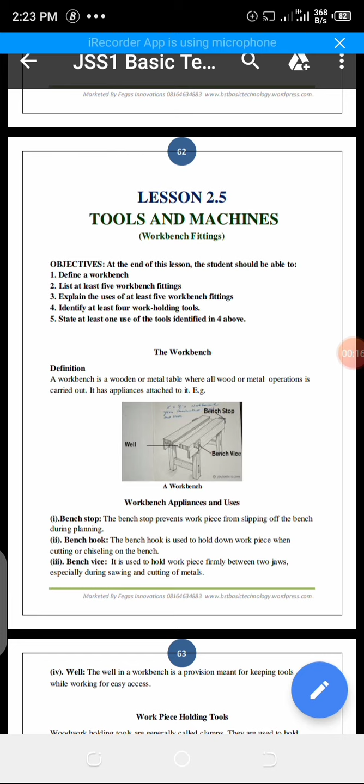So, what is a workbench? A workbench is a wooden or metal table where all wood or metal operation is carried out. It has appliances attached to it.

What is this definition saying? It's just like a table. If you go to a tailor shop now, you see a very big table, that's where the tailor will do the cutting and everything - it can be called a workbench. If you go to a carpenter shop now, you see a very wide table too. You see chisel on it, wood grains on it, a planer on it - planer is used for smoothing. You see so many things on it. All these tables are all called workbenches.

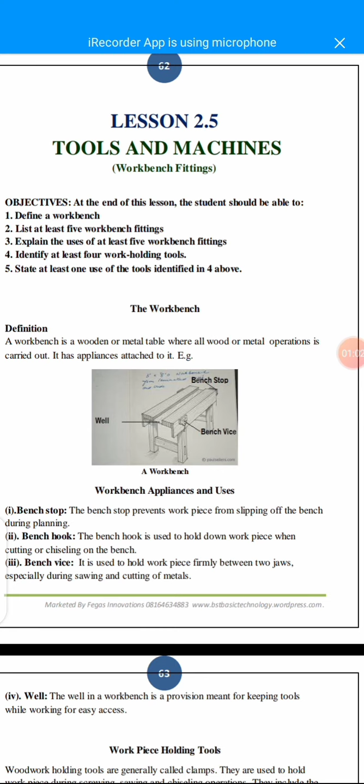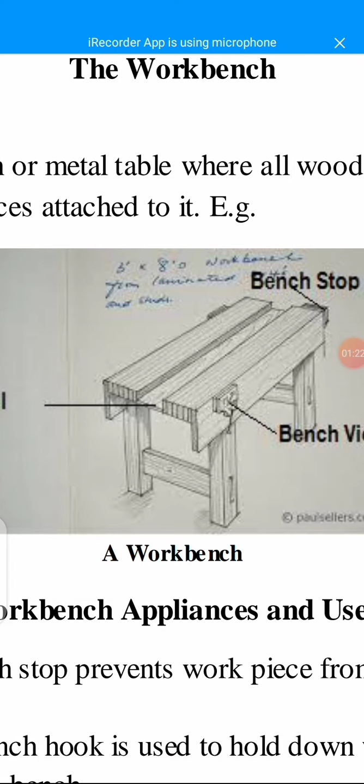Also, if you go to a welder's shop too, you see something like that. This is like the picture of a workbench, and it has different appliances on it. It's just like a table - it can be metal or wooden, based on the purpose. For a welder now, a welder cannot use a wooden workbench.

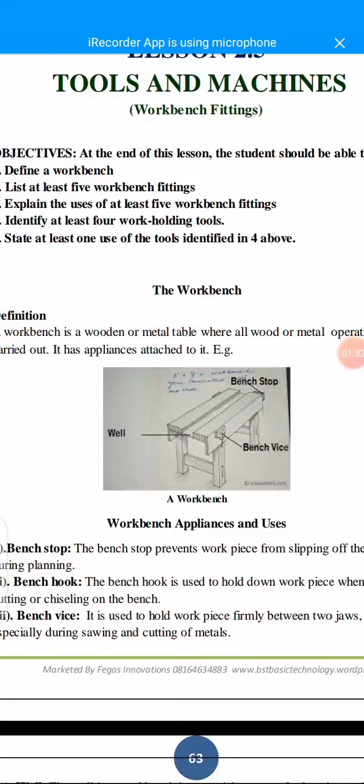It won't work because they work with electrical welding arc and electric stuff. So now we have some appliances, and these appliances have uses. When we talk about workbench appliances, we're talking about appliances attached to a workbench - just like electrical appliances, when you see electrical stuff like a radio, they are all electronic appliances. So these are workbench appliances.

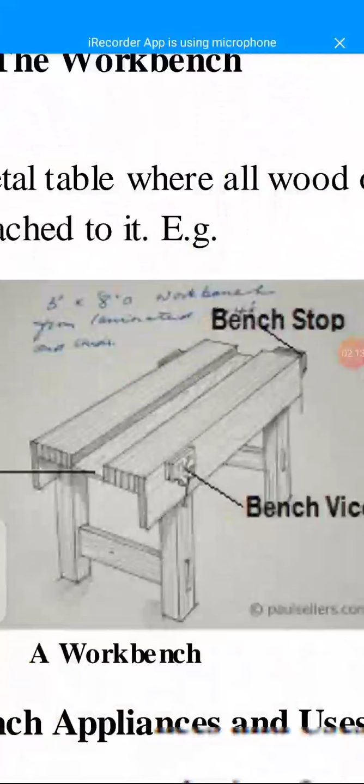The first one is called the bench stop. What's the function of the bench stop? If you look at it, the bench stop is towards this corner. The function of the bench stop is used to prevent workpiece from slipping off the bench during planing.

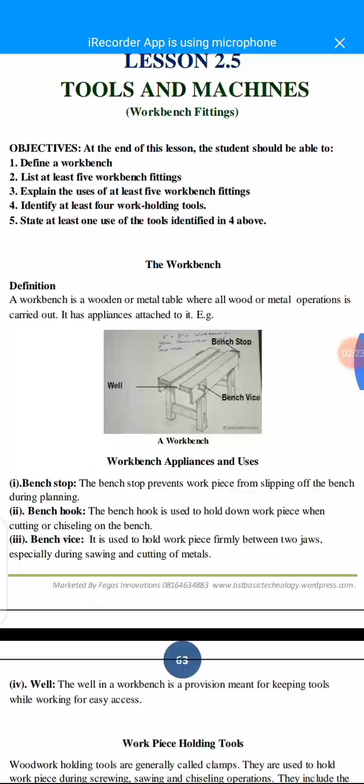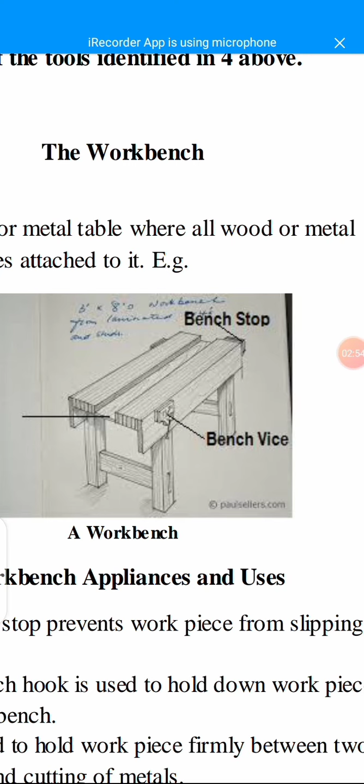Planing means smoothing of something. So when you are smoothing your wood, trying to use a planer, there's something called a bench stop that will not allow the wood to move. The wood is an example of a workpiece. Don't let the word workpiece confuse you - it just means the thing you are working with. If you are a plumber, your workpiece will be a pipe. If you are a welder, your workpiece will be a metal. If you are a carpenter, your workpiece will be a wood.

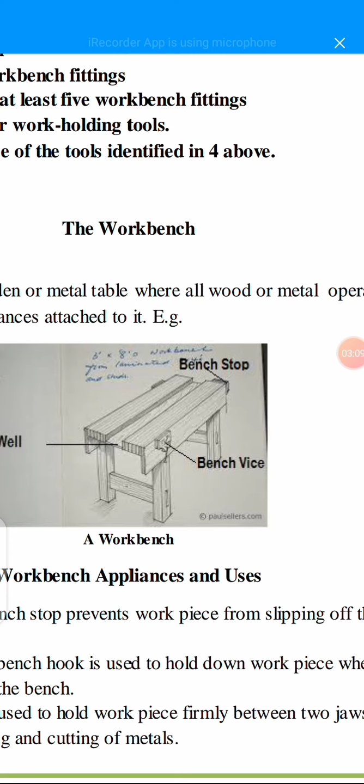So the bench stop allows it not to slip. When they are working, instead of the apprentice having to hold the thing for them, they don't need that. They just put it on the workbench, and the bench stop will help them hold or prevent the workpiece from slipping.

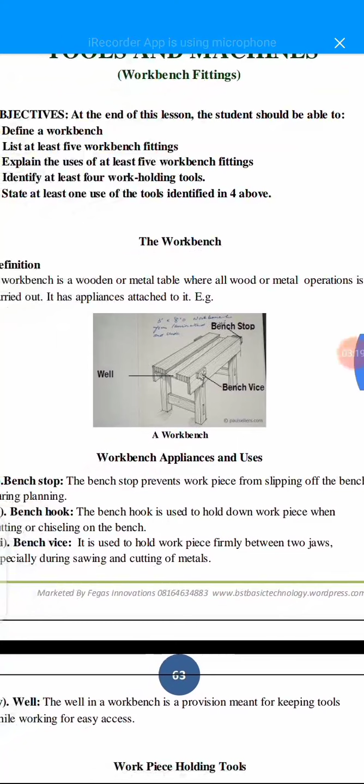Another one now is the bench hook. The bench hook is used to hook or hold down workpiece when cutting. So when you want to cut something, you don't have to tell the person working with you to hold this thing for you to cut.

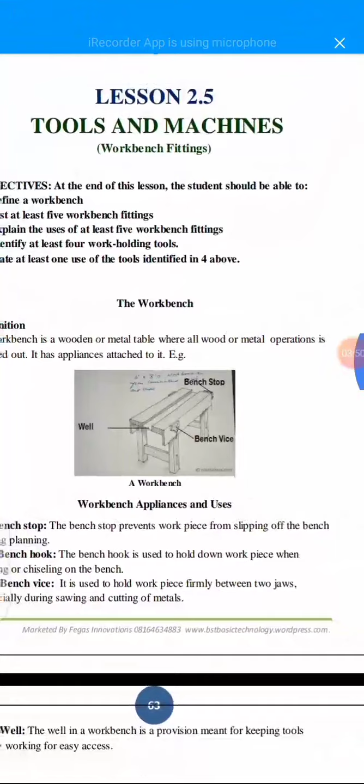You might end up injuring him, or sustaining an injury yourself, because you don't know when you might just cut his finger. So you have to put it on a workbench, and the bench hook will help prevent that workpiece from falling - it will hold it down, pin it down, just like a policeman hooks a thief or criminal from their clothing.

They are hooking them to prevent them from running away, so that whatever work they want to do on them, they'll be able to do. So that's the bench hook. And that one is called bench vise.

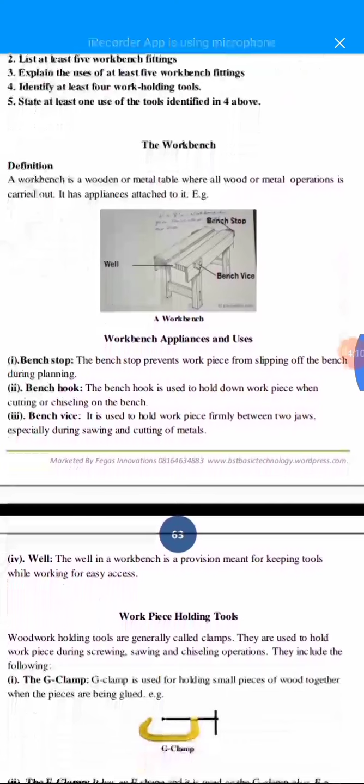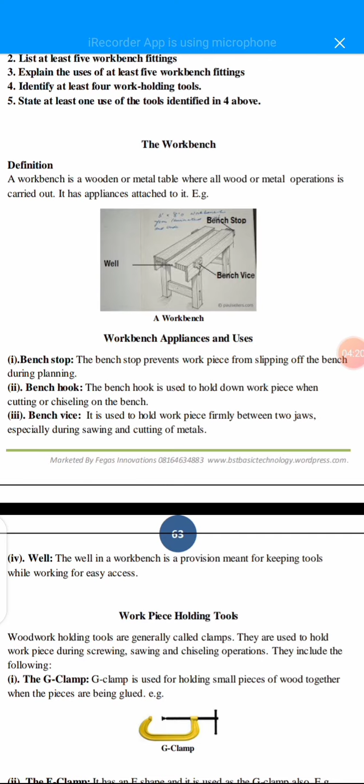The bench vise is used to hold a workpiece firmly between two jaws, especially during sawing and cutting of metals. That is when we use the bench vise. It's always beside the workbench, used to hold something firmly between two jaws.

If you notice, the edge of the bench vise is like letter 7. That edge is where you put the workpiece, so there's a way it forms a 90 degree angle. That's why we said it's between two jaws, that side of the bench vise.

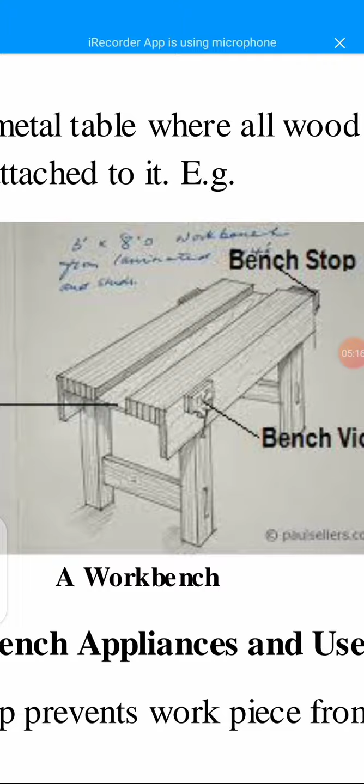Another one is called the well. The well is like a drawer, used for keeping your hammer and chisel. It's inside the workbench too, a separate area on the workbench. The workbench has many areas, one of which is called the well, used for keeping tools while working for easy access.

So when you want to work on your workbench now, you don't have to run and go bring something from somewhere. No, everything is already on the workbench, so you don't have to be going up and down. It makes work easy. So that is all about the workbench.

So we now have workpiece holding tools, not the workbench now. What are the tools we can use to hold a wood, that are not on the workbench? You know the tool we use to hold a workpiece on the workbench is called a bench hook. But now we are talking about tools that are not on the workbench that we can use to hold stuff too. These woodwork holding tools are generally called clamps.

Clamps are used to hold a workpiece during screwing, sawing and chiseling operations. We have three types of clamp: the first is G clamp, the second F clamp, and the third sash clamp. The G clamp is named based on its shape - if you notice, it's like a G. The F clamp too is like an F. It's the sash clamp now that is different.

So I'll tell you the difference between the three. The G clamp and F clamp are used for holding small or very small workpieces. If you notice, only something small can enter that space between the edge and the screw - for the G clamp and F clamp, you see that space. So they are used for holding small workpieces.

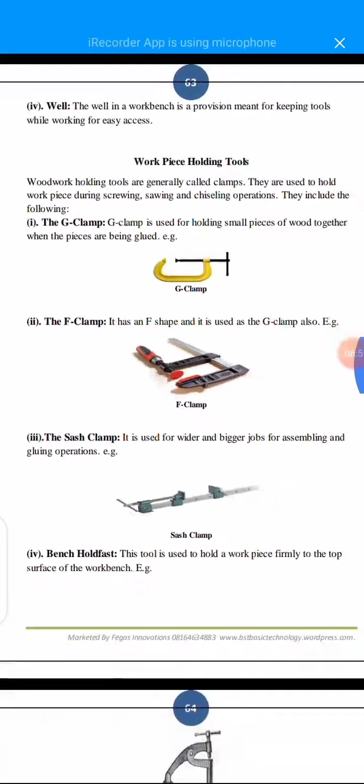But the sash clamp is used for doing wider and bigger jobs. So if you want to do a wider job, a very big job, and the workpiece cannot fit into the G clamp or F clamp, you go for the sash clamp.

Another workpiece holding device apart from the clamps is called the bench holdfast. This is used to hold a workpiece firmly to the top surface of the workbench. All these things are holding devices - you use it to hold something firmly to the top of the workbench. And this is the picture of the bench holdfast.